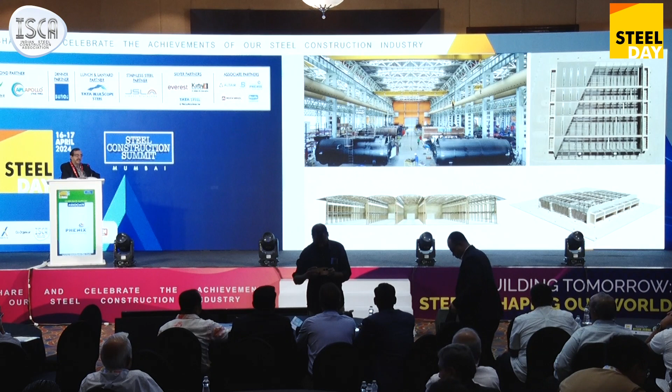This is how the space was from inside. It's got spans ranging from 18 meters to 27 meters across, and about 6 meters in the shorter direction. The height goes up to 13 meters. This entire workshop is about 100 meters deep, completely naturally lit. The idea was to have it naturally ventilated and exhausted until the government said, no, you need evaporative cooling, and then these duct socks were introduced much later after the building was designed and erected.

When we started designing it, we started as architects experimenting in what the column should be. These were the various studies we'd done for columns. It's not that we came up with an option and said this is the solution. Our structural designer would come and say it doesn't work, or it fails miserably, or it's over-designed, it's under-designed, and then we would go back to the drawing board and start again. So it was an experiment, a learning process, and we learned how to adapt to this material, how to live with this material, and how to mold it the way we want.

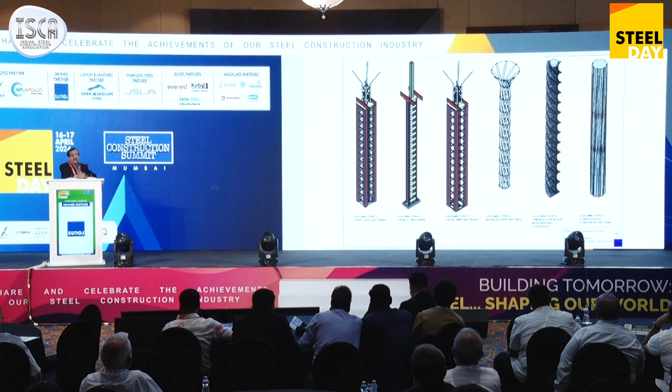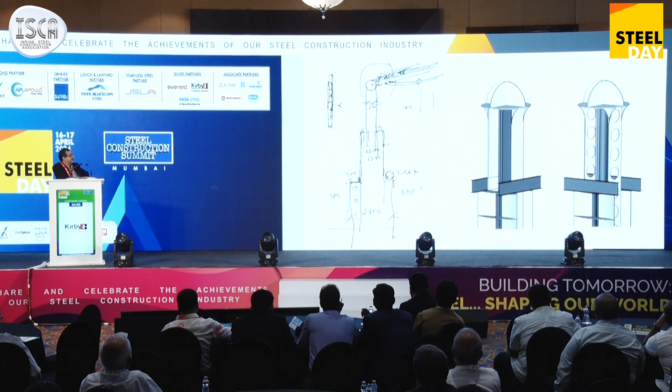These are various options done when changes would come from the client side and how they wanted the elements to work, how the loading of the crane would suddenly change, how the truss would sit on top. So all these details were done. After our study and research, we came up with a structure like this. But then we realized it looks a little too boring, so we made it a little more interesting. The details, the terminations, how the cranes would run on top. And finally coming to a structure that would have details like this.

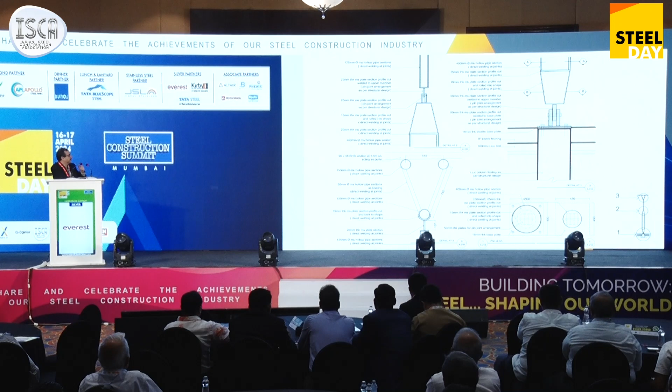So these are the details done for the trusses at those times. Much smaller scale than that, about 8 meters height, 6 meters center to center, but basically no cross trussing. The bottom detail, the fixity, the movement, how the plates would weld to each other, the gusset plates coming. It's all in the detail, and it's fun to create these details.

And obviously then they are detailed out by the structural team, and they detail it further, and then the fabricator comes with his set of drawings. And it's all a process that we as architects enjoy doing. And we can build and experiment, create something different. It's still the same steel structure.

And I think what we were listening to earlier, how the old time industrial buildings were very rigid and very monotonous. But with the same concept, how they can be developed and created into something which is much more interesting, both visually as well as functionally.

This is the cross section of the building when completed. Again, a very lightweight structure, completed in, I think, only 4 or 5 months after the erection started. So those are detailed drawings done. And the breakup, how the elements merged into one another and created this lightweight structure.

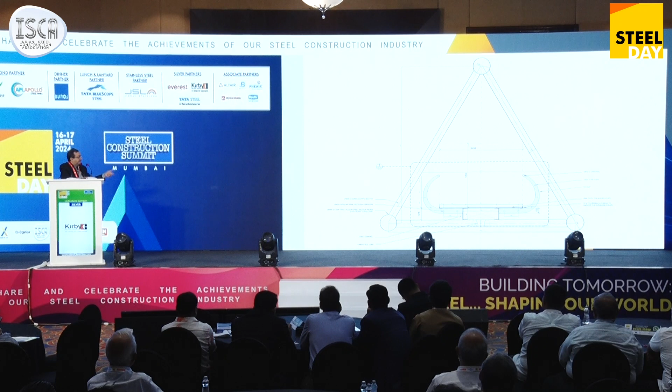This is the pure mix of RCC and steel, the RCC pedestal and the steel beam hitting into that. This is the cross section of the bridge. The actual walking area is a reduced area inside with everything inbuilt into it. So the structure itself lends stability to the overall.

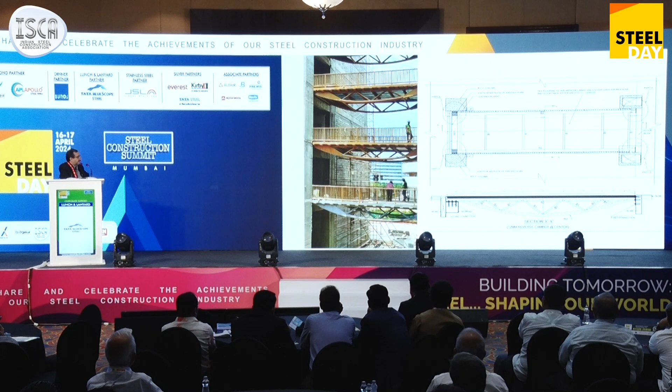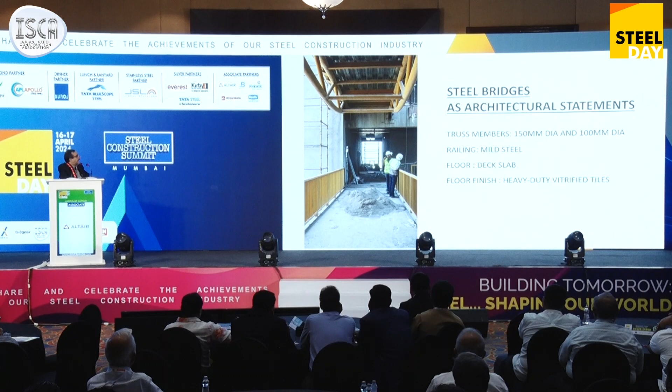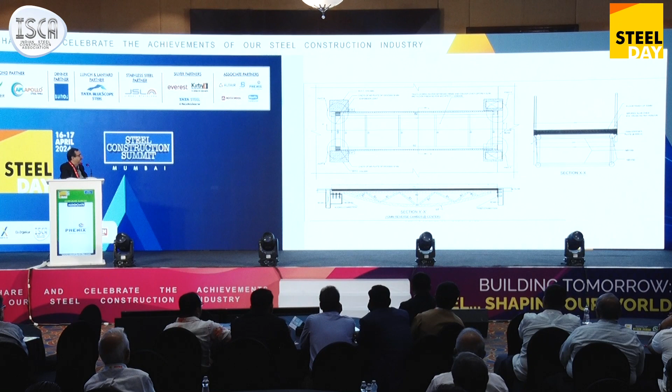These are bridges we've done in IIT Hyderabad, linking 2 buildings. They are at different heights. Again, they work as composite elements, integrated both with the structure as well as in the RCC. So one side is hinged and one side is just resting.